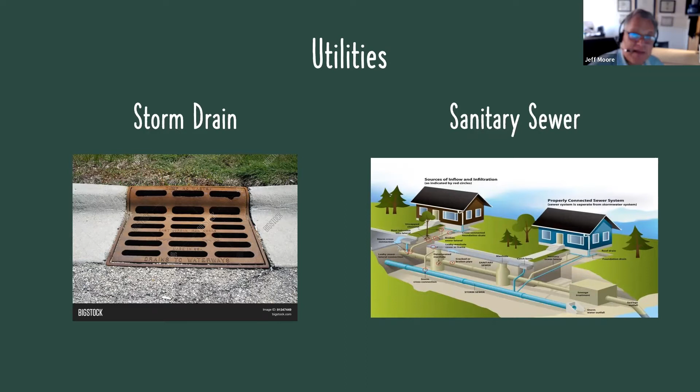Sanitary sewer systems. Again, most of the time in the built out areas, you've got a municipal sanitary sewer system, but there are lots of properties around the Bay Area that still use septic systems. How does that get implemented into the site design? And how does the engineer and land surveyor contribute to that?

Other utilities we often deal with are cable TV and fiber optics. Fiber optics is an interesting kind of a beast. It doesn't happen too often, but the thing you need to know about fiber optic lines is if you hit one or if you have one in your property, they're oftentimes encased by large chunks of concrete. It can be quite an impediment and a barrier. So something just to be aware of in the back of your mind: if you ever see a fiber optic line, something special might be happening here.

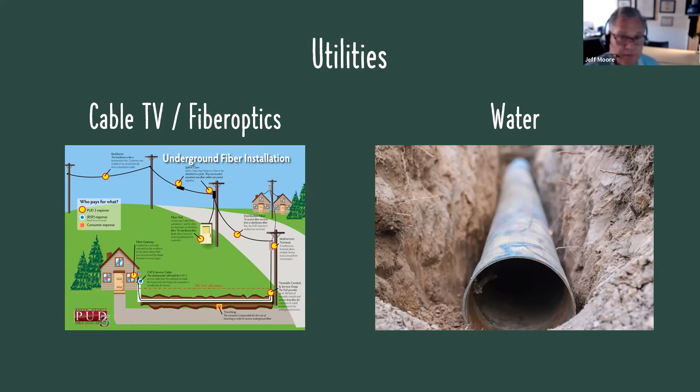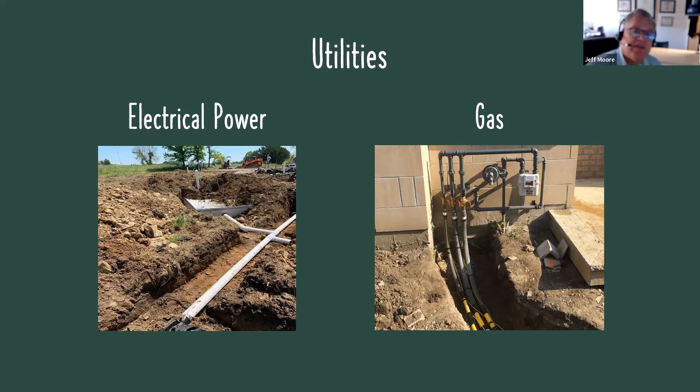In regards to water lines, there's all sorts of water here in the Bay Area. We've got domestic water, fire water. Oftentimes they're different systems. There are water wells, and some municipalities deal with recycled water. And of course, there's electrical, power, and gas. Pretty straightforward. Really, the site-related issues on these are how do you fit everything into the space that you have, and that's really a lot of the civil engineer's responsibility too.

All right, well, we've talked about utilities, so big deal. Utilities have been around forever. What's the problem? From a civil engineering standpoint, typically problems arise when the architect does not have the appropriate utility information at the appropriate time, resulting in what can be a disaster. That's really sort of the bottom line. You need to make sure you understand what you have and where it is, so you can have an effective design. Very simple in principle, oftentimes gets overlooked or it comes in at the wrong time, creating problems.

So from a utility standpoint, there's a few things that we all want to know. Well, what size are the utilities? What's there? How big are they? Where are they located horizontally and vertically? And the last one here is a real issue that oftentimes can really get missed: are the existing utilities adequate to meet the needs of the project? Is there enough water? Is the sewer capacity adequate? Do you have to upgrade the storm drain system? And this is a particular problem that we're going to discuss.

So when you're looking for utility information, where is it normally shown? Well, as you probably are aware, normally you're going to see portions of it located on a topographic survey provided by a land surveyor. But one of the issues I think that gets lost is that depending upon the surveying firm, utility information is not always shown. It has to be requested. And so if you want to know where manholes or utility information is in an adjacent street, you oftentimes have to request it. It's sort of like buying a car. You can buy the basic stripped version, but if you want to get air conditioning and you want to get GPS, you need to ask.

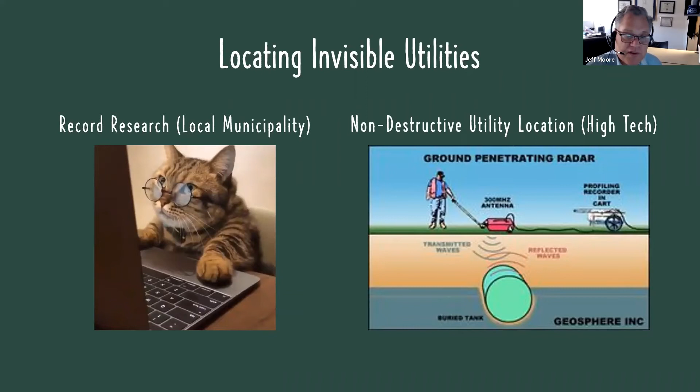We talked a little bit about potholing, or to dig or not to dig. Sometimes on projects, there are critical utilities where you just have to know. If you can't make this particular critical utility infrastructure installation, it might kill your project. There are some that are that sensitive. So, oftentimes on these critical ones, we want to make sure that the owner understands the risk associated with critical infrastructure. So we'll recommend potholing. It's typically when you have a gravity system crossing something.

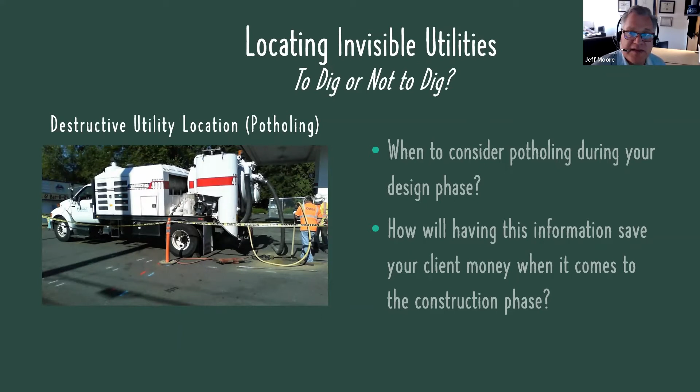I had mentioned earlier the issue of adequacy of existing utility. If a civil engineer is going to have a nightmare, this is the type of thing we dream about. This is a real bad situation. You go through a project, you've been told that there's public utilities, there's water lines, there's sewer, and then wham bam, at the end of the project, when the developer goes to get their utility permits, you determine that there's simply insufficient capacity. Well, how do you find that out?

Only a local utility agency can actually make that determination. Typically, a consultant would not do that. And in order to get a utility agency to make an adequacy determination, you have to submit a formal application, oftentimes with complete design drawings and fees associated with that. And in a situation where many of our projects occur, an owner may not want to spend all this money at the beginning of a project. Typically, if a project is going through an entitlement process, some sort of design review or a subdivision, the project isn't a done deal until they get planning approval.

And so they don't want to spend a lot of money at the beginning of a project. So we understand that, and so we're sensitive to our clients' costs, but you don't want to get hit at the back end of it. So what we will oftentimes do is do a risk assessment with the architect, suggest a timing for when this might be done, help them prepare a budget and contingency plans.

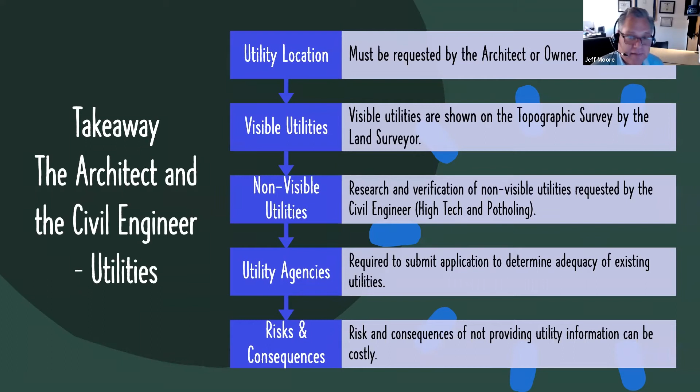So we're going to move on now to stormwater control and treatment. So why is this important? The biggest reason that an architect really should care about it is because it takes up a lot of area on the site design. And if you've got these infill sites, which is pretty much most of the Bay Area anymore, there's not a lot of spare sites, and you want to make sure that they're incorporated into the preliminary design at the beginning, so you don't have to do major rework.

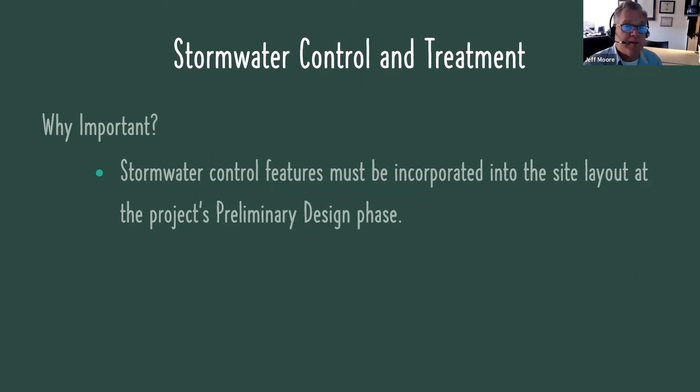We spend a lot of time working with clients who come to us where we have to go ahead and help them walk through this on plans that have already been designed. So what's the difference between the two? Stormwater control, simply put, is just a method to slow down the rate of water leaving the site. That's really what it's for. It slows it down. And typically it's achieved by underground chambers, bioretention areas, or other types of devices that hold the water.

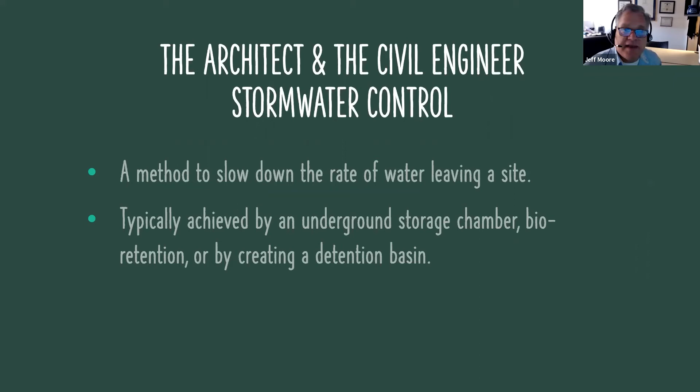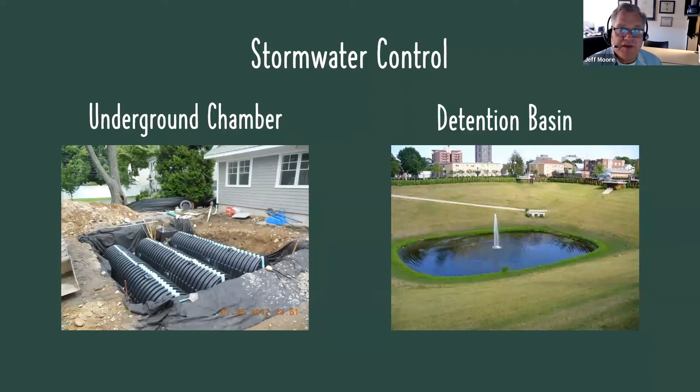Well, these things take up a lot of area, they're expensive to build, and you want to make sure you understand where they go and how big they are right from the get-go. The surface detention basins are also another way of dealing with this. It's the same thing, it's just they're on the surface, but it takes up a lot more space.

Stormwater treatment. All right, we've talked about stormwater control. Well, stormwater treatment, most of you might know it as C3, the state required mandates for stormwater quality, and that's what this is. And that's a pre-treatment system of stormwater before it enters a stormwater system or creek.

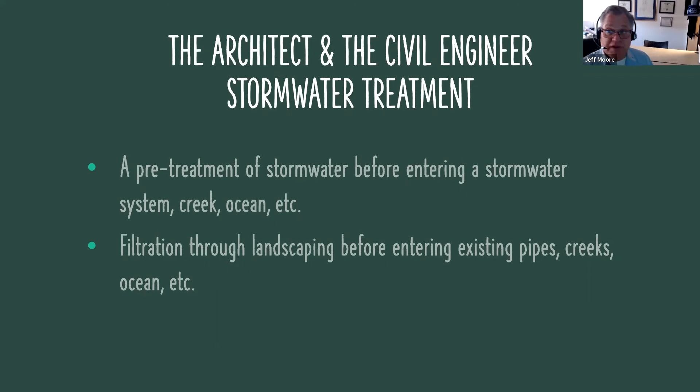And think of it as getting the big chunks: bags and leaves and sticks and large pollutants and styrofoam peanuts and all that big crud that you don't want going into the stormwater system hits these bioretention areas, and it's filtered through the soil medium before it goes into the creeks. So in essence, it's just a pre-treatment system. And these bioretention areas are probably the most common ways of dealing with it.

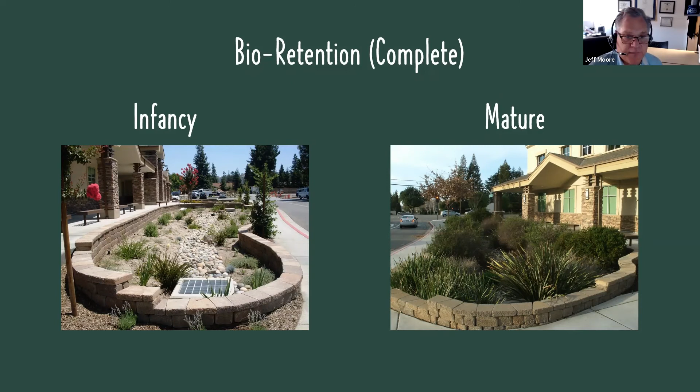And this is a project we did on the left. There's this bioretention when it was first built, looks kind of sparse and barren. A lot of people don't like these, owners particularly, because of the aesthetics. They don't like the plant selections that have to be made in order to accommodate the high moisture content in the soil. But if you look on the right, over time, they can be very attractive and grow out, if designed nicely.

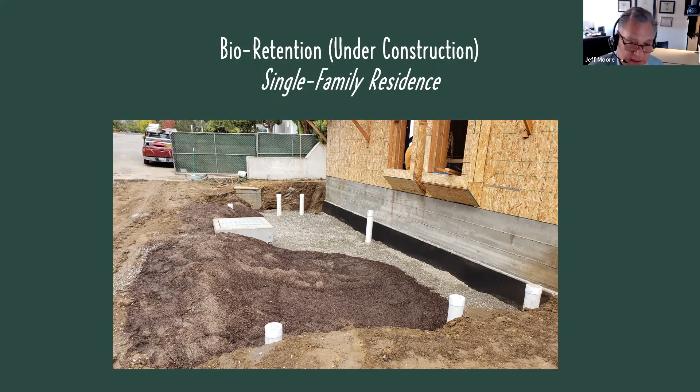So these are oftentimes on sites placed directly adjacent to structures like this picture here. And it's important that you know where they're going to go, because it can have a big impact on your structural foundation depths. Moisture infiltration and water infiltration into structures is a big issue. And so knowing where they go, how big they are, how to deal with all this stuff is one of the reasons why you want to make sure you understand this design concept right at the get-go. It's tough to add these after the fact.

So when dealing with stormwater treatment, there's some magic numbers here. So 4%, that's a key number, and that's the minimum amount of water treatment area required. It's 4% of whatever impervious area you're working on. So it's very easy to calculate.

For those architects who deal predominantly with single family residences, the good news is you're typically exempt from stormwater requirements. It's true there are some lower level water treatment issues that you have to do, but it's nowhere near like building these bioretention areas and things like that you do for a large subdivision or for commercial development.

5,000 square feet is an important number for commercial parking lots. That means full compliance. So why is this important? Why does an architect care? Well, if you do commercial projects and you're doing expansions to industrial buildings or anything commercial,

and you remove and replace 5,000 square feet of asphalt and perhaps regrade it a little bit and maybe add a small addition, well, if you hit 5,000 square feet, you now have to have a fully treated stormwater system. And it's not so hard for a new development because it'll be included in the design, but man, it's tough if you've got to come back in and put in a brand new bioretention system in an old site.

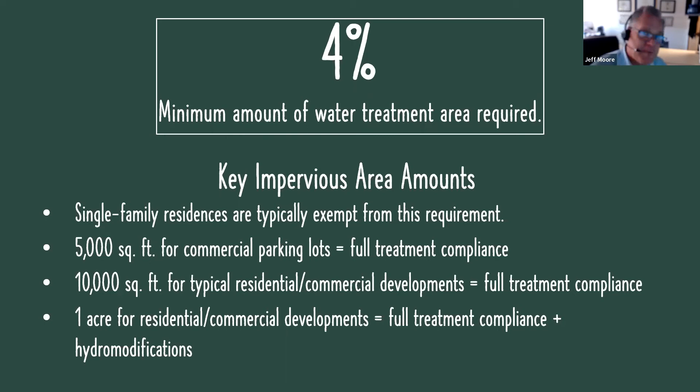The only thing you need to be aware of is that if it's over an acre, just know that your civil engineer is dealing with this for you. You don't want to forget it because it's expensive to find out later. That is my mantra on this whole thing: it's very expensive to get surprised by this stuff later.

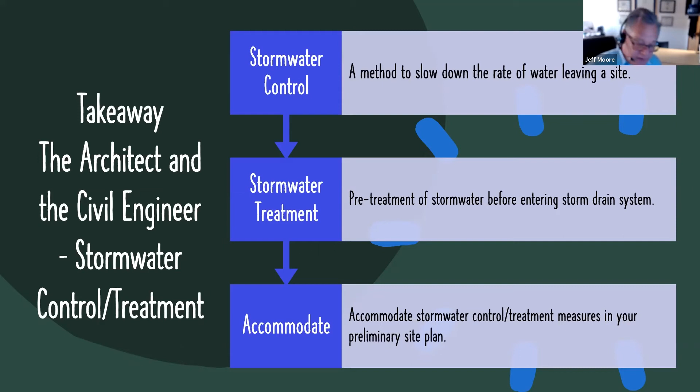So the takeaway from the architect and civil engineer on the stormwater issues is that stormwater control controls the rate of water leaving the site, slows it down. Treatment treats it, pre-treatment, get the big chunks out before it hits the storm drain. You need to accommodate these in the preliminary design to make your life a lot smoother. The civil engineer should be responsible for helping you do that.

So the architect and the land surveyor. Now, this is an interesting area of working with our architects, and there's a lot of confusion about different types of surveys, and the confusion typically comes with the actual boundary. I'm going to go into that in a little bit of detail in a minute. So the type of survey that many surveying firms will provide is a topographic survey. That's kind of the meat and potatoes, bread and butter. Almost everybody's familiar with those.

And there's two different types of surveys, simple and complex, but we also do boundary adjustments. These are certain types of surveys or maps that deal with moving property lines. And there's also something called an American Land Title Association or an ALTA survey. I'm going to walk you through these quickly.

Topographic survey with a record boundary. What's up with that? Well, as you all probably know, a topographic survey really does two things. It's a scale drawing that graphically indicates visible surface features: houses, retaining walls, driveways, sidewalks, curb cuts, visible utilities, all pretty basic. And then there's the property line, the boundary that's shown on most topographic surveys. Well, this is called a record boundary. So what the heck is that?

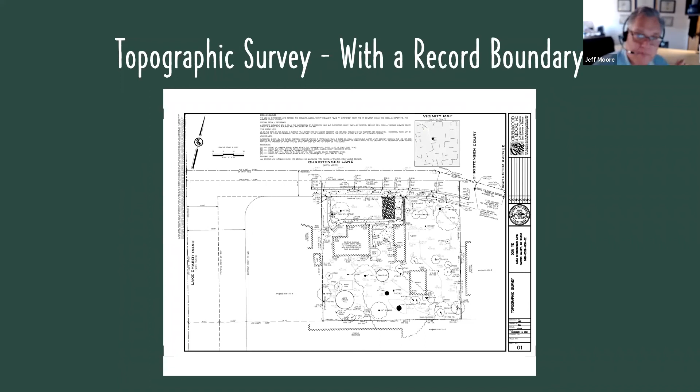This is what 99% of people need to do the development, is this type of a survey. You can do the same type of a thing with an aerial or a drone survey to do the measurements. And same thing with the record boundary. It's compiled. We'll just plop it onto an image that's taken from an aircraft or a drone.

Okay, boundary surveys. So we get asked all the time, I want a boundary survey. Well, a boundary survey, I think the simplest way to place it is when most people want to know and see a physical marker. I want my corner staked. I want to see where the property line is. Okay, that's fine. If you do that, you have to file with the county a recorded map.

If it's a simple project, you can file what's called a corner record. The surveyor will tell you whether it qualifies or not. And there are certain requirements in the Map Act in the state of California that allows you to do this. This is an 8.5 by 11 sheet of paper. It's fairly simple and inexpensive to do, and it's a filed map.

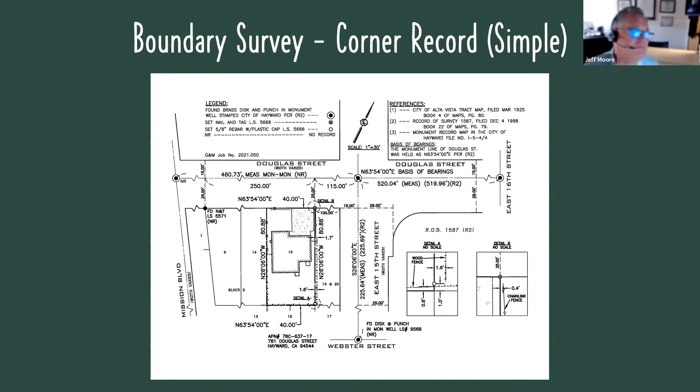Great, no problem. Well, if you have a real problem with the boundary, and this happens, commercial developments, subdivisions, it doesn't matter. If you want to know where your property is and staked, you're going to file a record of survey. It's more expensive. It takes longer to get approved by the municipality, but this is the gold standard. If you've got a problem with your boundary, if you're having a dispute with your neighbor, there's an encroachment of your property that's discovered during the topographic survey in the record boundary, you'll get it resolved by filing a record of survey.

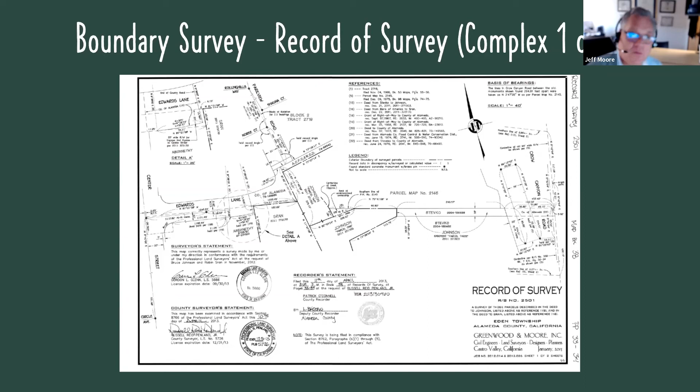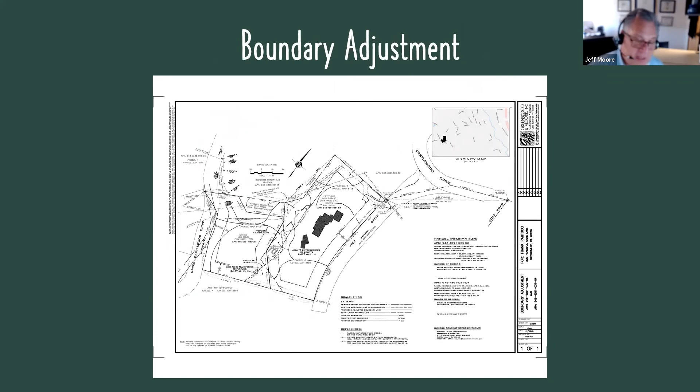Takeaway on this is that topos don't give you stakes in the ground. You start marking properties, you get some sort of a recorded filed map called a boundary survey. A boundary adjustment, simple type of a map that just shows how property lines are moved around. Get these pretty frequently. Also, if you're going to merge parcels, it's done through a boundary adjustment. And so we do lots of boundary adjustment mergers in commercial development. So just to be aware of that.

An ALTA survey, it's a special type of a survey that's typically used for commercial refinancing. It's to make sure that a lender understands what's on a property. It's kind of a combination. It's a hybrid. It's not a boundary survey per se, nor is it a topographic survey. It's a site plan with a record boundary on it.

The only thing you need to care about is that if an architect gets an ALTA survey from an owner and gives it to the civil engineer or surveyor and says, hey, I've got my survey done, you probably don't. It's a lot of good information. It's certainly valuable, but you're not done with an ALTA survey. You'll probably need to augment it with a topographic survey.

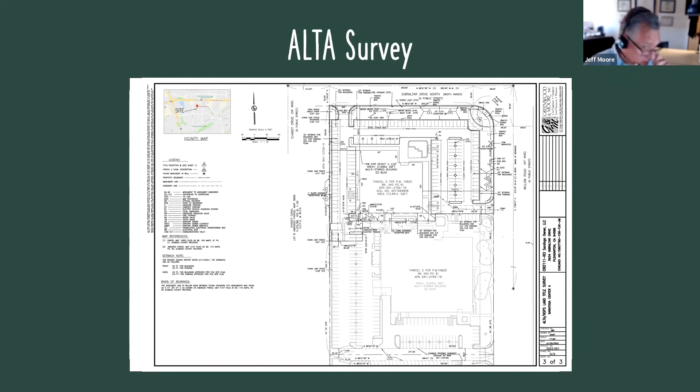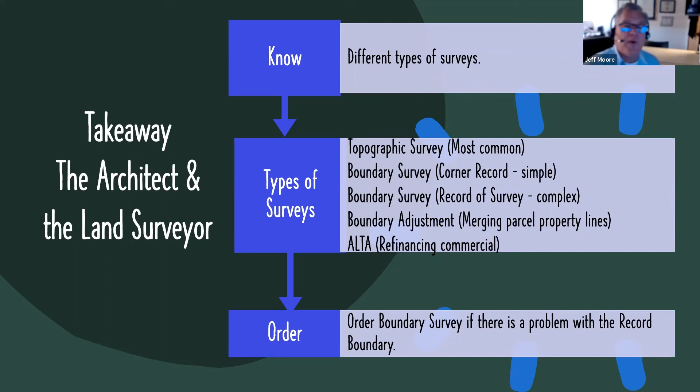So the takeaway on this portion of it is that there are lots of different types of surveys. Topographic survey is the most common. Boundary surveys, simple and complex. Boundary adjustments, ALTA surveys. The key on here is to get with your land surveyor at the beginning. Let them guide you through the process. Then you can go ahead and make sure the owner is aware of the potential need for survey requirements. Doesn't come as a surprise. We can keep them updated all along the way, and that way it just becomes a smoother process.

So I'm kind of wrapping things up here. When you start a project, you're going to want to start with a topographic survey with a record boundary. You're going to want to request utilities to be placed on the topographic survey. Don't forget, you have to ask. A boundary survey might be required if there's a problem with the record boundary. If you want property staked, you just have to ask for it, understand the ramifications.

When you're dealing with stormwater control or treatment, engage the civil engineer early in order to make sure that you've properly accounted for them in your gross site planning. Utility verification should be assessed at the beginning to determine if it's an issue or not. And if it is an issue, what's the plan of attack? How do you deal with it so it doesn't come as a negative surprise? And again, consider bringing the civil engineer and land surveyor as part of the team. And I would actually add the landscape architect much earlier than has often been done in the past.

And so this is sort of a little checklist. I would say that if you take anything away from this particular presentation, it's just to know what questions to ask or what things your team members can do for you. Architects are responsible for a lot of moving parts on projects, and they don't have to remember the 4% rule or all the areas, but if they know that, gosh, there's some things I should deal with now, let's get them on the team, let's explain it to the owner, this is why it's justified.

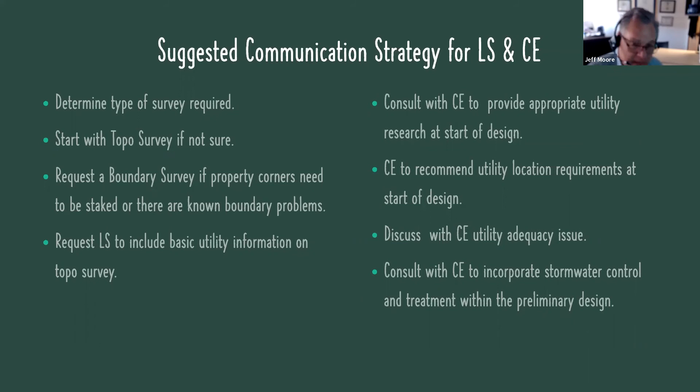They can go through this little checklist and just determine what type of survey you need and start with the topo if you're not sure. It's a little bit of a duplication of the previous slide, but it's something you can take with you and hopefully help you in assessing your needs. So while I wrap this up, I want to go through just a couple of slides here on some illustrations of some issues that come up and how that applies to this presentation.

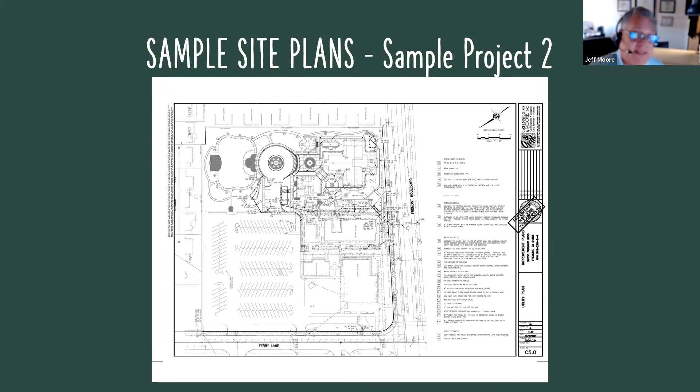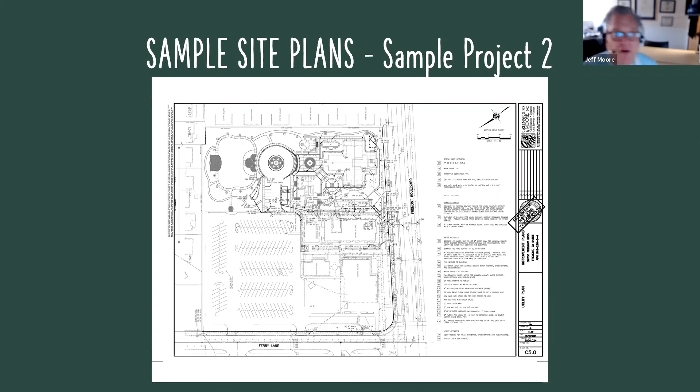This project is one in Berkeley where we were working with just a top-notch architect, and we knew from the start that utilities were going to be a major issue. You can see that this property is bordered by 2 streets on the side, and there's a railroad track and another street. So it's encompassed by old streets, very poor infrastructure. We were very concerned that there was not going to be enough adequacy for the fire sprinkler systems without a complete major upgrade.

And we tagged that right at the beginning, and the architect and the owner authorized a research portion of it to ensure that we understood where this was going. So it's something that got caught, and this would have been a disaster to find out after all the entitlement work was done for this multi-phased commercial project.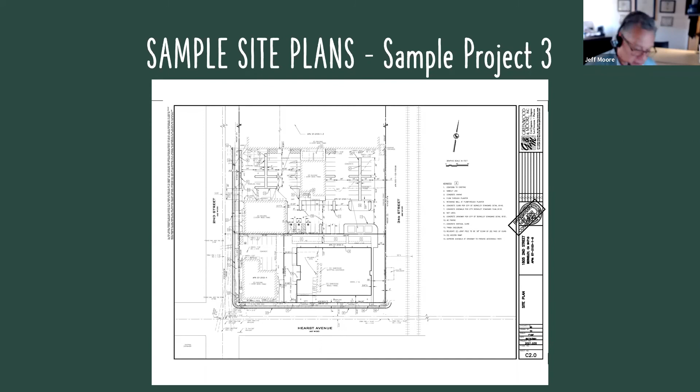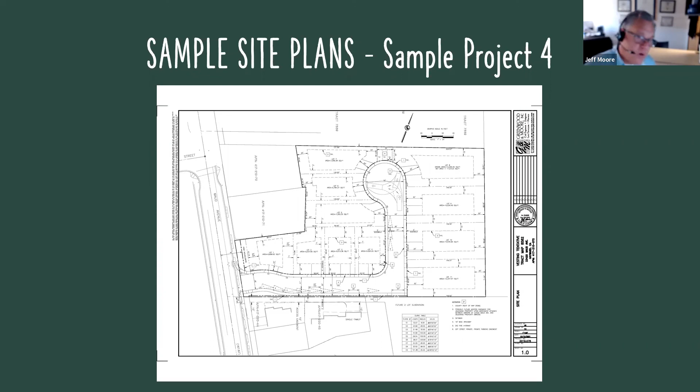And this last one illustrates a residential subdivision where, same thing, we had concerns about water capacity issues, and sure as shooting, we contacted East Bay MUD. It absolutely turned out there was a major problem. And because it's at the beginning of the project design life cycle, the owner was able to understand the ramifications and budget accordingly. Now we're coming up with preliminary designs to make an application way ahead of time. We don't even have the entitlements for this project, but we need to understand how much it's going to cost to expand the water lines, and also ways to get neighbors perhaps to pay for it.

Wow. So that is the end of my presentation on the exciting world of land surveying and some civil engineering stuff. And with that, I am happy to answer any questions. Okay. Let's see. So I've gotten a couple of comments.

I have one that says, so land surveyors do not research for hidden utilities? In my experience, that is not the norm. They will do visible utilities. I suppose it's possible to have a land surveyor out there who will do that, but it's generally been my experience that that is not the case.

We have another comment that says, what does full treatment compliance entail? Well, that's a great question. Full treatment means you have to comply with the C3 stormwater control measures that are implemented by the local municipality in accordance with the state mandates. So what does that mean? If you're doing a 10,000 square foot commercial remodel, you have to size the bioretention or treatment areas to the 4%. And you have to make sure that it's located so the 10,000 square feet of area drains properly to it, and that it controls the water flow.